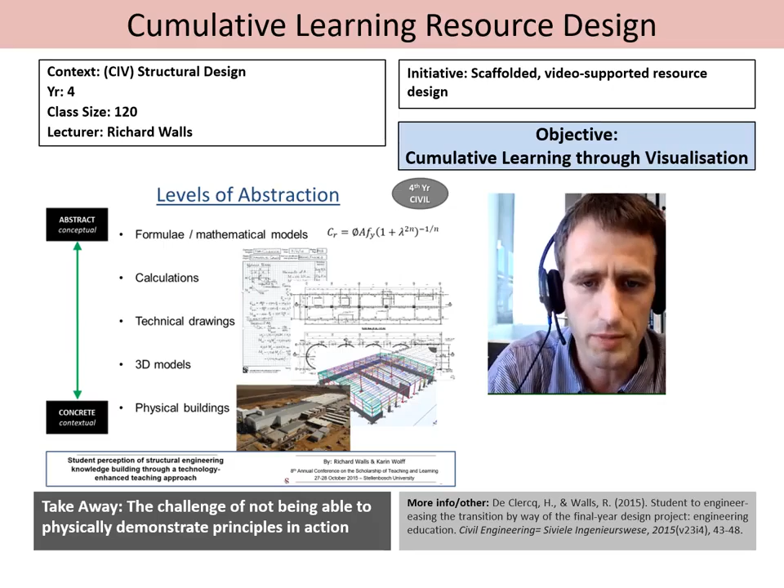One thing that did work well was using a lot of very visual slides, really trying to break things down - for instance, in building design, how does the flow of forces move through the structure? So part of it was spending quite a period of time trying to design visuals to help show what you would normally do in sketches and explanations in class.

I tried with tutorials, but unfortunately tutorials were fairly poorly attended in general. I was lecturing in the first half of last year when we transitioned - we had 6 weeks face-to-face and then 6 weeks online. With that transitioning, it was a little bit messy and still getting up to speed. So I think the tutorial attendance was low.

I found, to be honest, having a tablet in those tutorials made a big difference, just being able to sketch on the screen. Unfortunately it would only affect 10, 15 students at a time, although I understand students would share that amongst themselves, and sometimes we would record the session. So I believe some of the lessons were learned by others, though I'm not sure to what extent it's a good thing that tutorials are recorded for those who couldn't make it, and also a bad thing that people think 'I don't have to attend, I'll watch it later.'

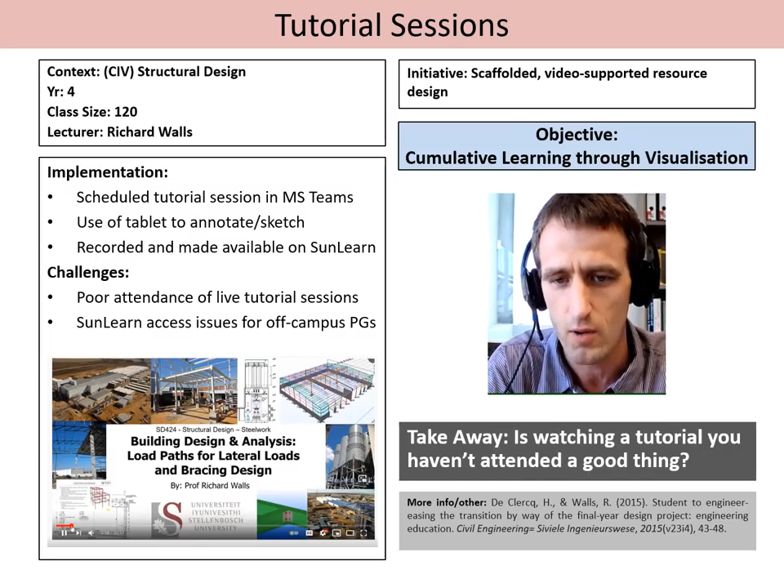So we simply ran them on MS Teams. I have my tablet, I link my tablet and the screen, and I screen share, and then I just write. That was beneficial - that was the best I came up with.

A number of people in our department have that Wacom tablet, and I believe that worked very well, because then you're not even linking your screen to the tablet - it was actually live writing in OneNote. Those who've used it appear to be very positive about having a tablet to link directly to the computer.

All our lectures were pre-recorded, given the challenges people were having online, so all the lectures were pre-recorded and available online. We followed that up with tutorial sessions where we answered questions. We also had a forum where people would post questions and get answers. That was reasonably successful - they'd post asynchronously and we could answer. I think we tried to be relatively quick in our responses, normally on the same day, and I think that helped stimulate the work.

I understand students would follow it and see what other students were posting. I'm also aware of some challenges with the forum - especially when everyone was subscribed across 5 courses running simultaneously with posts, they were getting a tsunami of posts in their inbox from different questions and answers. I'd often see that questions had already been answered but students were posting them again or asking in tutorials - either they hadn't paid attention or it got lost in the inbox amongst other forum posts. So that quantity of forum posts is to some extent a slight hindrance, but at least everyone knows what's going on.

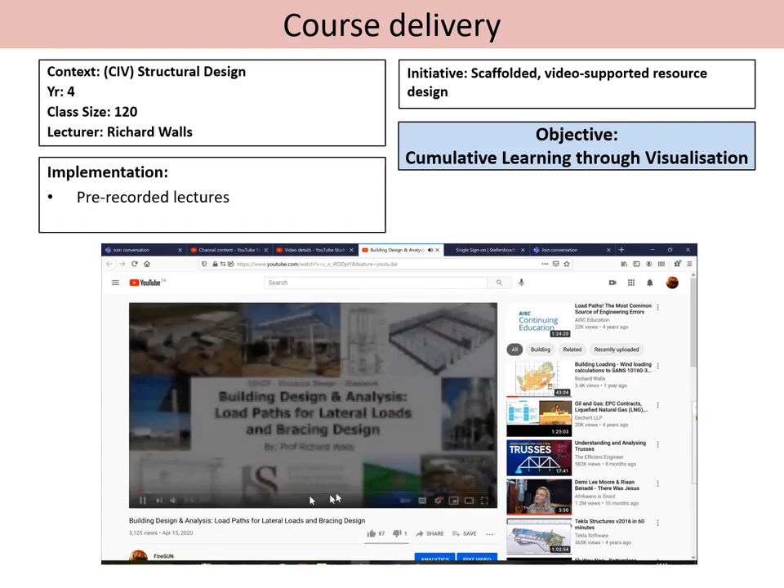Okay, so YouTube videos, load paths, it's 20 minutes. You can see me a little bit at the start - I normally don't include myself for very long, but I found the bandwidth, the file size goes up. But you introduce the system, go through the drawings of it, show some real life images of something similar, and that's what we're designing.

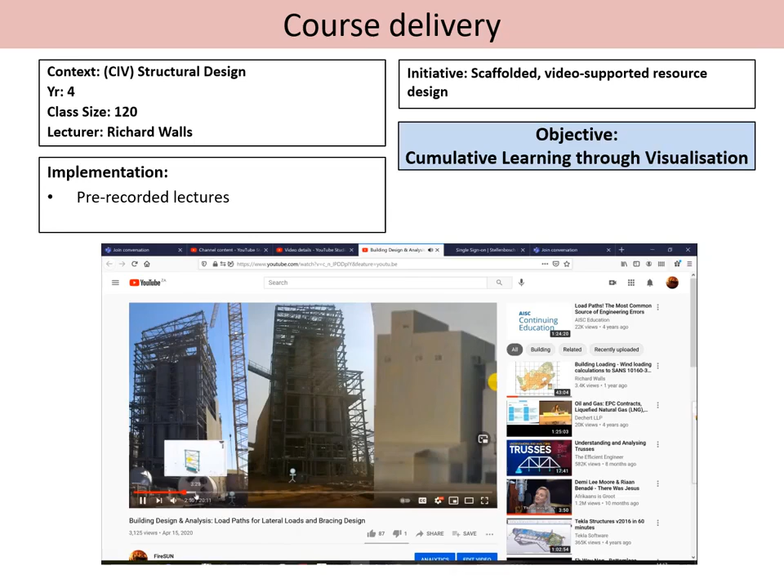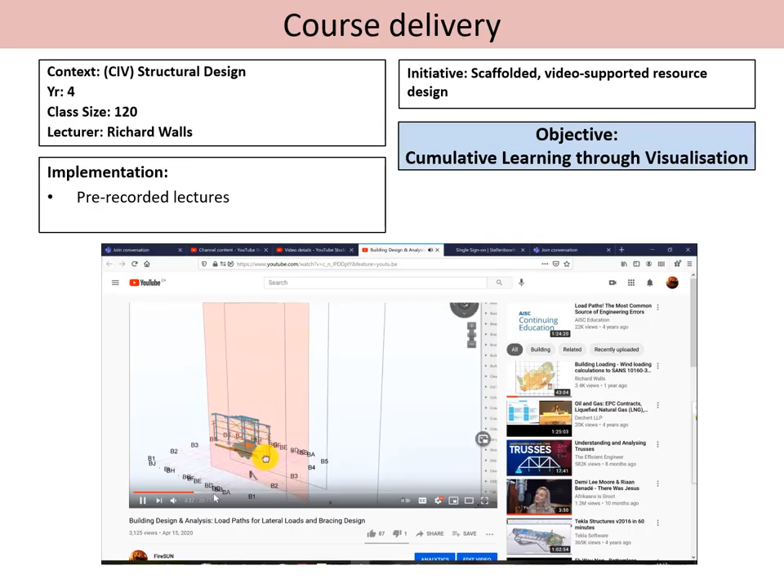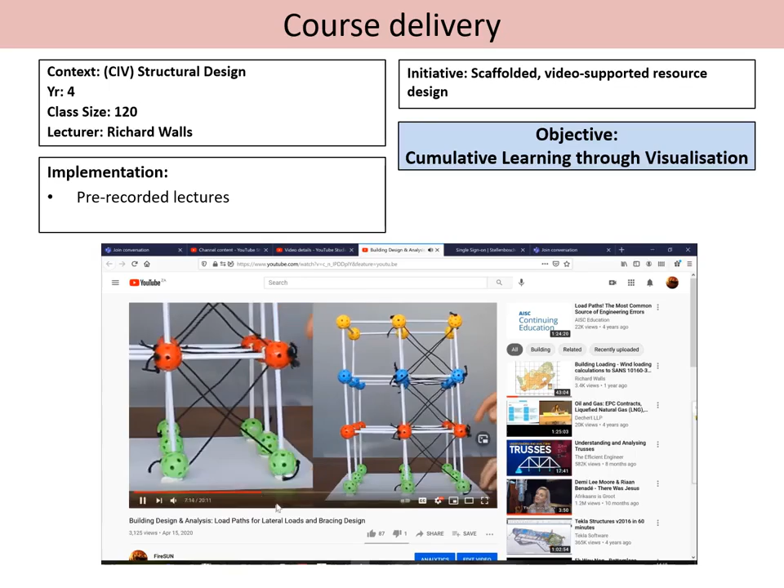And then I had some old three-dimensional models, so I spent a while talking through the models, which hopefully helped apply the work. Once we'd spoken through the real world application, we went into actually filming models in my office on the desk, and even blew them up to explain bracing design and the likes. Then we went into the design afterwards and ran the maths on the sketches they'd seen at the beginning.

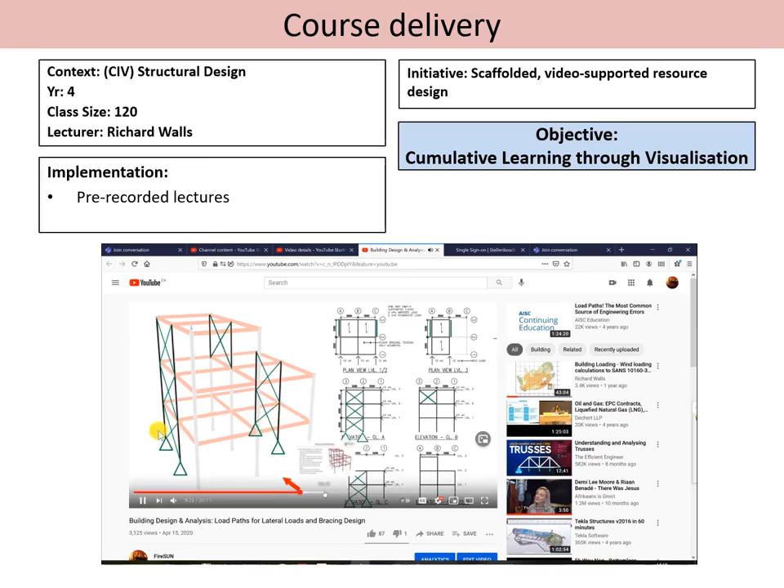So I first introduced the problem, then tried to apply it to the real world, then showed them physically what had happened to it, and then produced a bunch of slides to try to take them step by step through the concepts, with quite a bit of annotation along the way, trying to link the three-dimensional system on the left to the two-dimensional analysis model on the right.

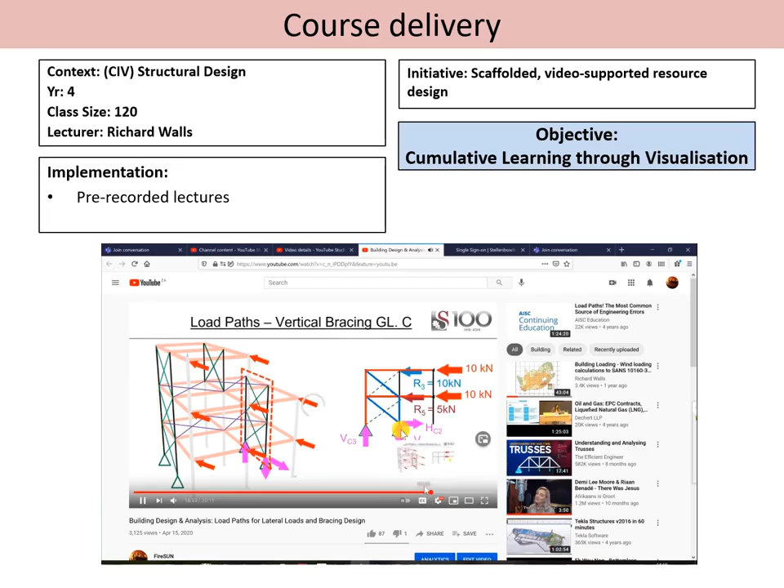This I found was quite time consuming, but it was probably the section of the course that people struggle with the most, so I put a fair amount of time into developing it. It took a lot of editing, but I think I could have done it more simply if I'd used my webcam more intelligently.

Webcam's actually great. Okay, I was going to say practically - so that is a 20-minute long video. Yeah, realistically, how long did you take to make that? Oof.

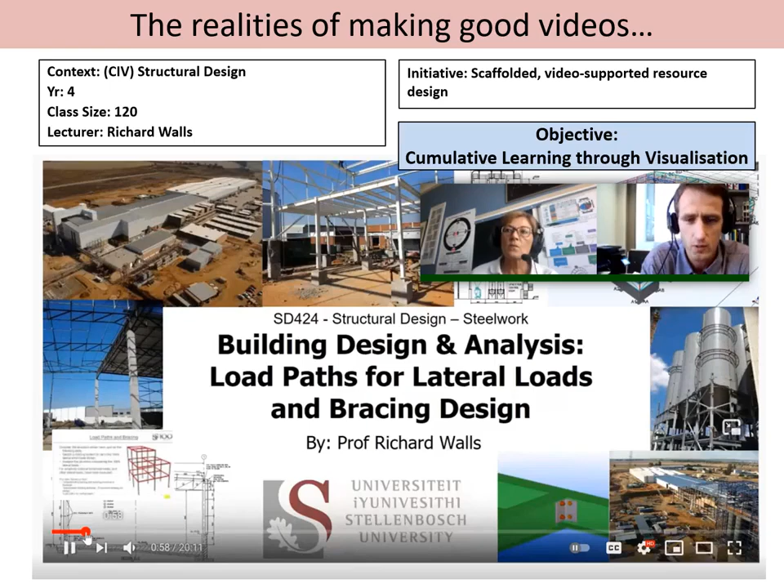If I stream the video straight with my webcam - I bought an HD webcam and it's great - I just point it at what I'm doing and it streams straight into Camtasia. What slowed me down a lot was having a separate camera, filming it, downloading it, editing, making mistakes and having to refilm. Capturing with a webcam is great.

That's it - see, you can see this is horrendously ugly. I actually did this on my tablet with all the software at the side, and it got 20,000 views and 190 likes.

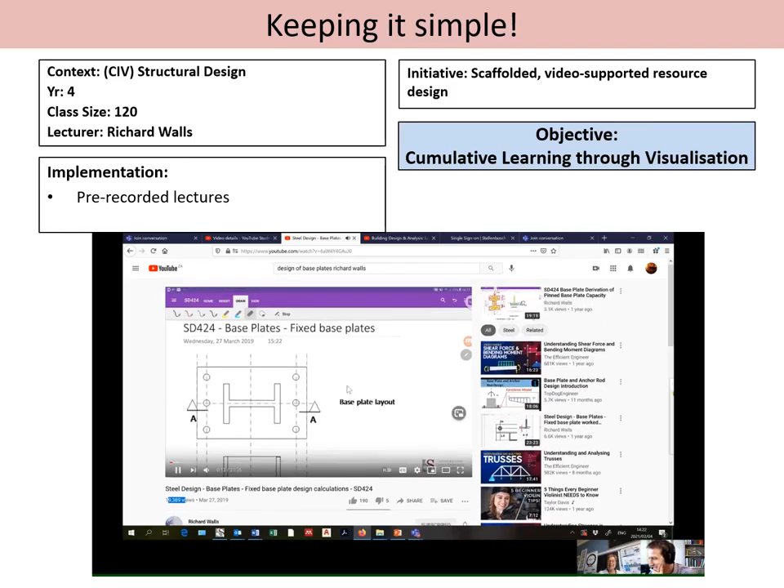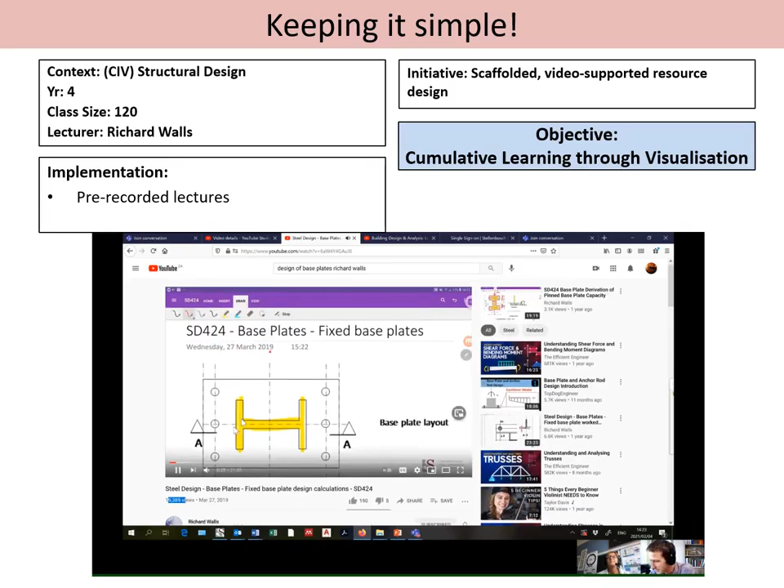That is so fantastic, I'm going to cut this in as well - so it doesn't have to be pretty to be liked. There's other stuff I put far more time and effort into, and you can see all the comments here of people that liked it. It didn't even take me that long - it was literally just sketching on my tablet with a screen record, and I didn't even edit the stuff off or trim the start and finish.

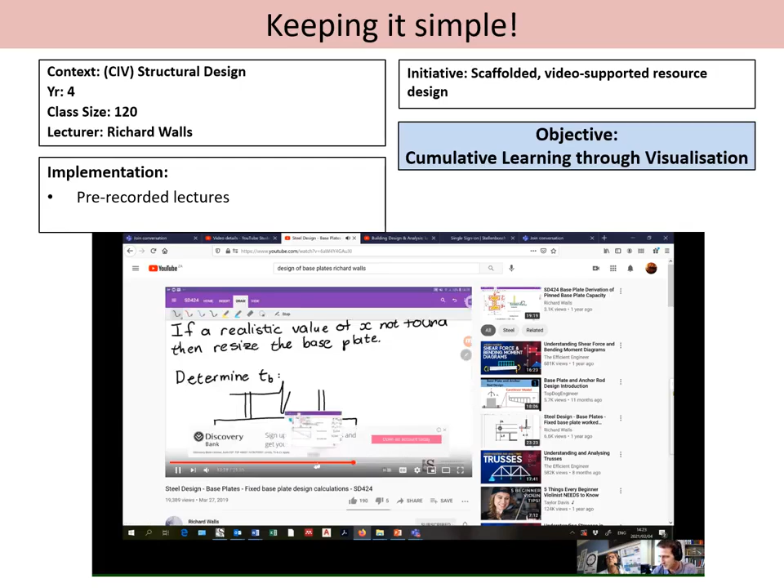One thing I'd say, at some stage, just to make people's lives easier, it would be useful for a postgrad course to have facilities set up so there's just somewhere people can go and everything's ready there. With the renovations, I'm seeing the boardrooms may almost be suitable for this.

But I set up something at my home in the height of lockdown - was this one of them? No, this wasn't one of them, I know that was a Lightboard. But if you have to do it more professionally, especially for paying people, it's nice if there's a decent setup that you can use.

Where did I put this - one of these videos. Because this is when you can actually have it all set up, you can lecture through it, like 'hi, here I am,' and you can actually edit yourself into your own slides.

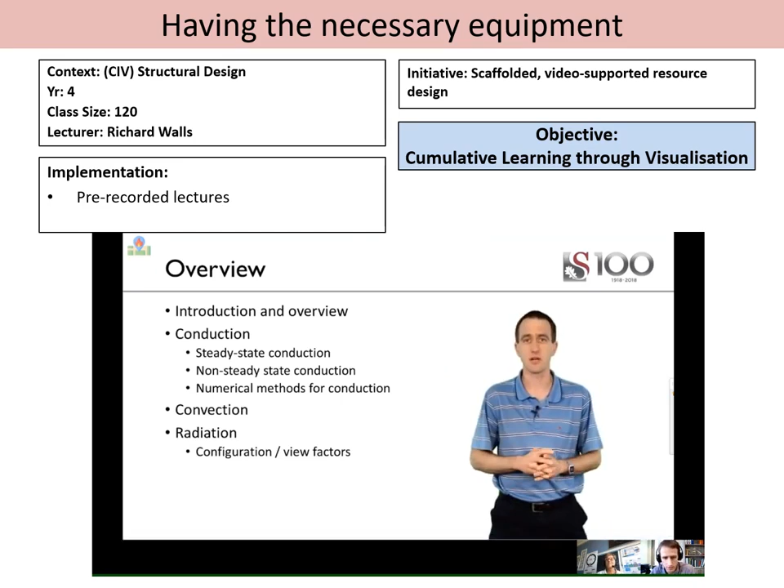It's hell of a boring listening to a 40-minute lecture of just yourself - it's really boring. Seeing someone makes a big difference. Having a room that you can just set up and go, where the equipment is there and you can fiddle with it, helps quite a bit.